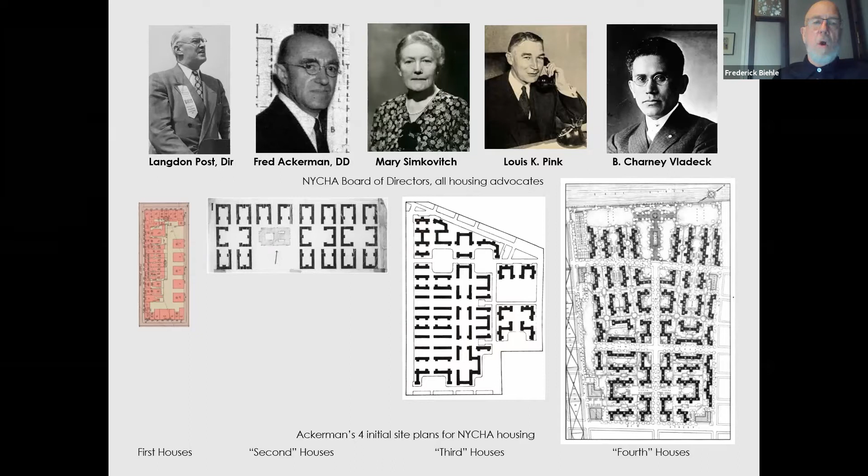For Williamsburg houses, NYCHA's next major development, Ackerman was prescribing what his experience had taught him would achieve a successful affordable housing model. His site plan was an open-ended perimeter block scheme, maybe even a bit boring in its deference to the more radical nature of NYCHA's mission.

Williamsburg was going to be 15 times the size of First Houses. It was all on the cusp of realization, an idea that Ackerman had been promoting and working towards since turning his attention to public housing during World War I.

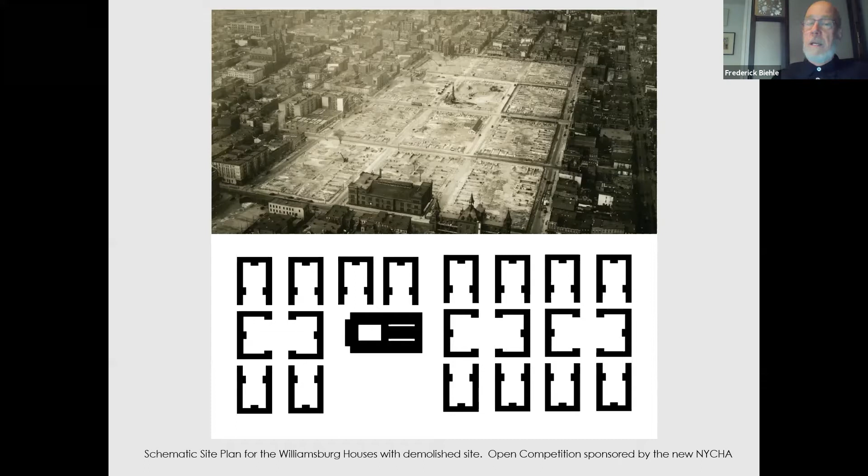But as fate would have it, Williamsburg houses would turn out not to be Ackerman's second houses. It would instead break with the accrued and tested housing expertise that the design group had endorsed and embrace someone and something else more exciting. William Lescaze and his brand of European modernism, who was imagining a wholly different future. Ackerman and everything he stood for would be out.

This was an action that in certain ways was a response to Philip Johnson and Henry Russell Hitchcock's critique from their 1932 International Style exhibition at the Museum of Modern Art, that American housing is sometimes an excellent illustration of sociological theory, but seldom an example of sound modern building and never a work of architectural distinction.

Williamsburg houses was going to be a work of architectural distinction, and it was also a response to Lewis Mumford and to the cascade of criticism that had rained down on that initial NYCHA project, Ackerman's First Houses.

It would be a propitious turning point, because architectural practice would henceforth need to choose between a daring formal style and a socially proven solution, between a disruptive spatial idea and a more conventional one. It was really no choice at all. And so consequently, for effective publicly financed affordable housing in America, that singular moment of opportunity was lost.

The early story of social housing in New York City is pretty well known. It begins in the late 19th century with housing reformers working to rectify substandard living conditions and reduce urban squalor. Minimum standards were introduced through building codes to make the interior spaces of multifamily buildings more livable. The New York Tenement Act and Tenement Law of 1901 were initial efforts at reducing block coverage and generating better access to daylight and fresh air.

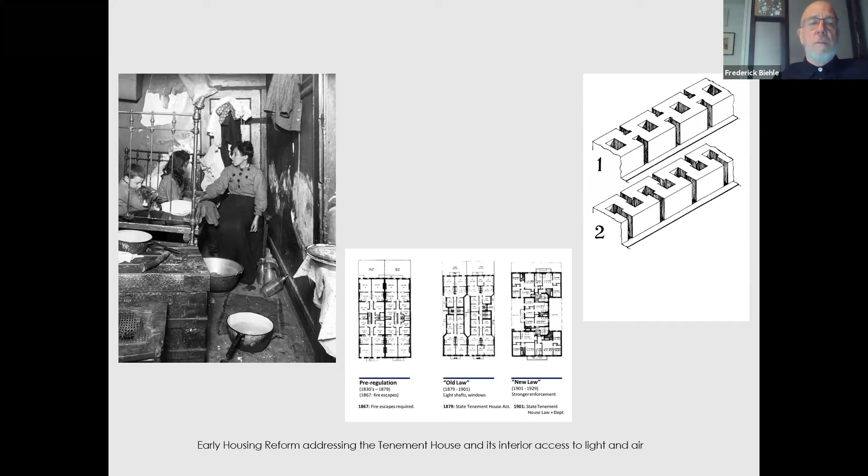In the early 20th century, philanthropic sponsorship promoted research into alternatives to tenement housing for the working and lower income classes. The architectural invention that emerged from this period was the perimeter block garden apartment. It was simply the result of applying the newer codes for lot coverage restrictions to the larger scale of an entire block. By controlling the block's perimeter, a new amenity, the interior garden court, was able to be introduced.

The 1920s would be the period for perimeter block development in New York. A survey of the projects produced by one of its leading practitioners, Andrew Thomas, gives a sense of the variety that an inventive and dedicated architect could produce.

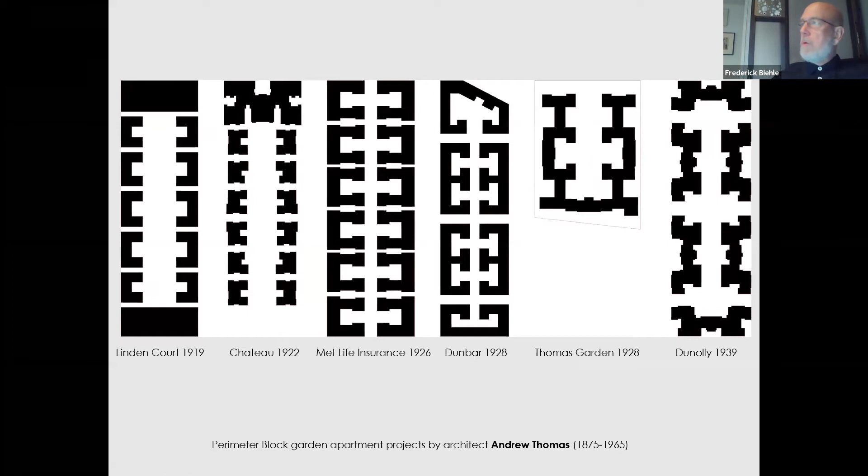Richard Plunz says of the type, "The garden apartment was and still is among the most livable housing in New York. It set a standard for urban housing that has remained unmatched since. The language of the garden was critical to the transformation of housing from a consequence of economic formulas to a unique environment, providing every building with an identity." Despite its success, the philanthropic initiative was of course not an adequate response for the demand for affordable housing.

And then with the stock market crash of 1929 and its resulting depression, the problem became a crisis. It would be addressed by Roosevelt's New Deal, but only when the political class came to the recognition that housing should be understood as a basic human right and thus a responsibility of the government itself.

The New York City Housing Authority was the agency empowered to manage the federal government's funding and to realize new affordable housing. Its history is really two conjoined stories, and both have been characterized by their quiet successes and loud failures. The first story tells of the struggles of those exceptionally dedicated reformers working with limited funding under a national spotlight to realize long-held aspirations.

A national housing bill would be passed, but only by accepting the compromises that distorted its underlying mission. Which begins the second story, how its leadership came to abandon the expertise of its own housing designers in favor of an untested and disruptive urban model, the Tower in the Park superblock housing estate. Consolidated under Robert Moses, NYCHA became an instrument of large-scale urban renewal. Demolition, so-called slum clearance, forcibly destroyed lower middle-class neighborhoods, doing irreparable damage to the lives of the very citizenry that NYCHA had been created to serve.

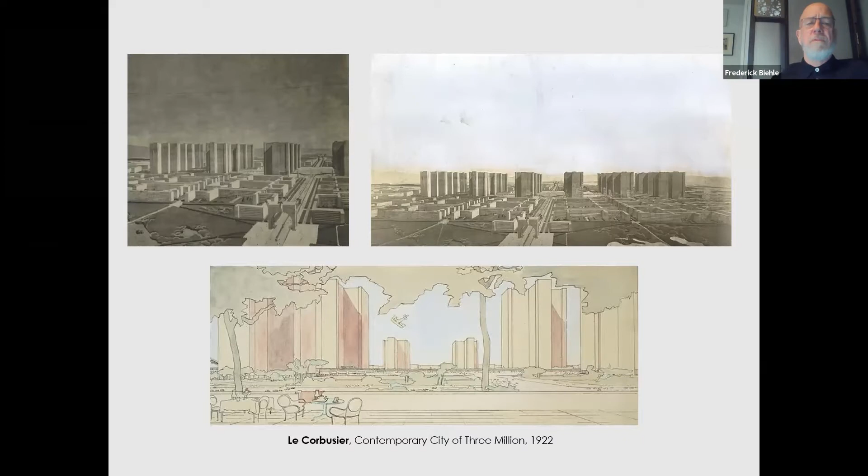He represented the scheme along with its adaptation to Paris as the Plan Voisin in his pavilion of the Esprit Nouveau at the Paris Exposition of Decorative Arts in 1925. He would also promote both projects in his quarterly publication, L'Esprit Nouveau, and as a standalone book on urban planning translated as The City of Tomorrow and Its Planning. As a provocation, it catapulted Le Corbusier to recognition, even as it remained, at least for the time, unrealized.

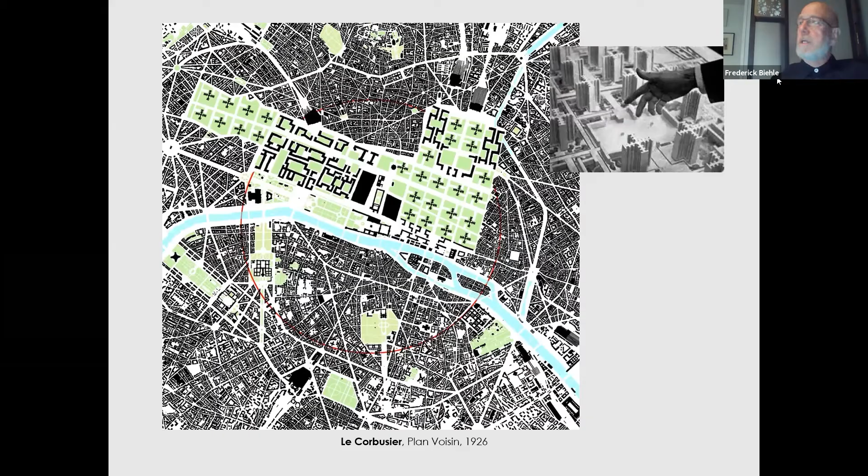In the early 1930s, the new ideas being championed in the United States were less about the tower and more about lower-rise, lower-density projects that had addressed the European housing shortage. Millions had been uprooted and an entire generation lost to World War I. Social trauma had persisted, resulting in rising labor discontent. Affordable housing was a key component for maintaining the stability of a capitalist system facing a crisis of legitimacy. In America, it would be the Depression that would generate the same post-war-like social trauma and instability.

During the 1920s in Europe, modernism blossomed in smaller towns where younger architects found municipal appointments or commissions. Otto Haesler in Kassel, Walter Gropius in Dessau, Bruno and Max Taut, Hans Scharoun, Mies van der Rohe in Berlin under Martin Wagner's public housing program. Thus would mass housing become the program synonymous with modernism. By embracing construction standards, a functional approach to necessary space, and providing an enlarged social program when planning large exurban neighborhoods or Siedlungen, they were solving the principal social problem of the day. Catherine Bauer promoted them in words and images as utopian in her influential book, Modern Housing.

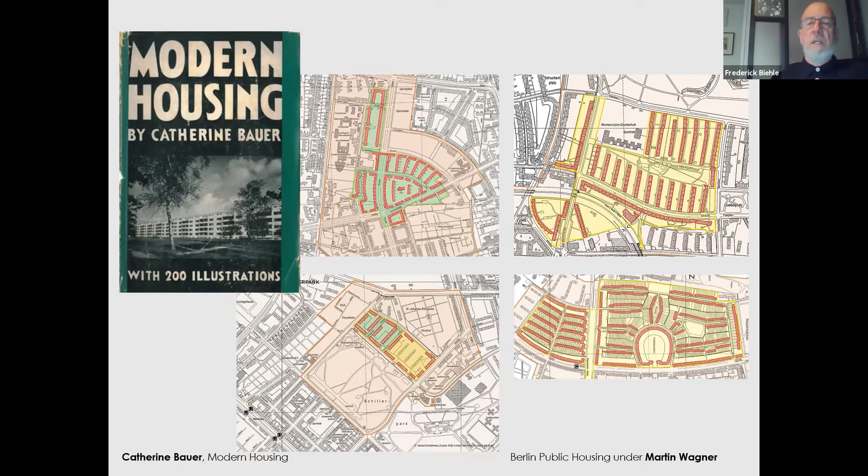This was the landscape surveyed by Philip Johnson and Henry-Russell Hitchcock for their groundbreaking 1932 exhibition, Modern Architecture: International Style, at the new Museum of Modern Art. The exhibit gave the museum an opportunity not just to showcase the research, but to critique American social housing by comparing it unfavorably with what was happening abroad. The criticism was made explicit by presenting an International Style proposal by Howe and Lescaze for a site on Manhattan's Lower East Side didactically, side by side, with German architect Otto Haesler's recent Siedlung Rothenberg in Kassel, a perfect example of the Zeilenbau planning that Johnson so admired. It was an authoritative display of what was being done in the German suburbs, together with what can be done in the American inner city.

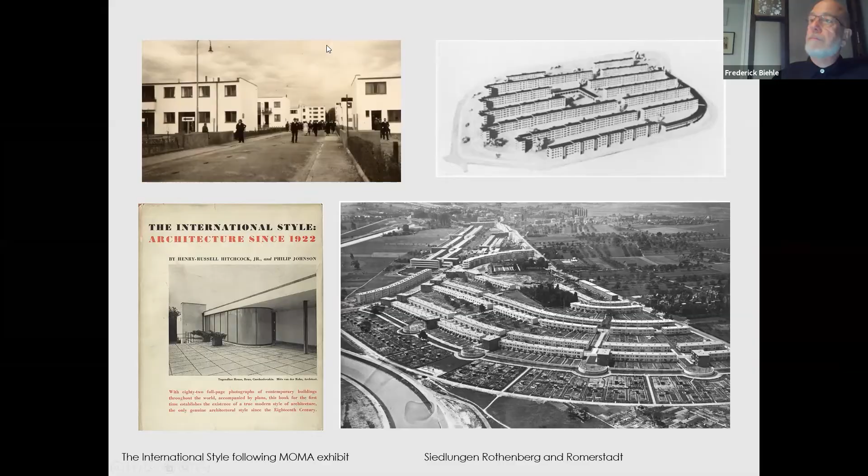The scheme, for which Lescaze later took full credit, was perhaps the most brilliant project of his emerging career. It adapted aspects of the superblock in a rather clever way to the long shape and scale of the site. It introduced New York City to the aesthetics of European-style social housing and anticipated the superblock strategies that would be embraced a few years later. It was a kind of superblock, but in the relationship between built form and open space, it was something of a Trojan horse. What made it so good was that it was still a fully urban project embedded within the gridiron.

But with its overreaching vertical presence, it could inaugurate the public to the idea that federally financed housing, then being debated, would not fully integrate into the surrounding city, but stand out and be recognizable as a wholly new identity. The project presented Johnson and Hitchcock's argument for a more intellectual functional style, relocated from the German periphery to the center of the American city.

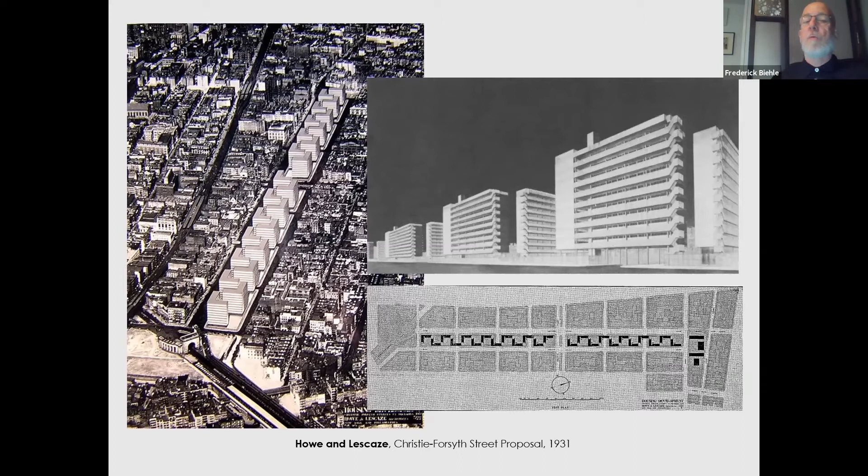The perimeter block garden apartment and its carefully built body of successful housing research was really dismissed. Johnson and Hitchcock were simply unsympathetic to the broader housing movement in the United States and the implications for architectural values and practice that it represented. As Plunz noted, they were, quote, promoting a moralism grounded in aesthetics rather than social activism, end quote.

The irony is that the positive evidence of those broader architectural values had been included in the very same exhibition itself. Because Mumford and Bauer had been able to curate the room on American housing, they had presented Sunnyside Gardens, which is there on the screen on the left, as the model of transatlantic exchange, a project that had managed to adapt European housing principles to American social, economic, and cultural realities. And yet Johnson banished images of Sunnyside Gardens from all publications on the exhibit. Its brick perimeter block form didn't fit his prescribed aesthetic.

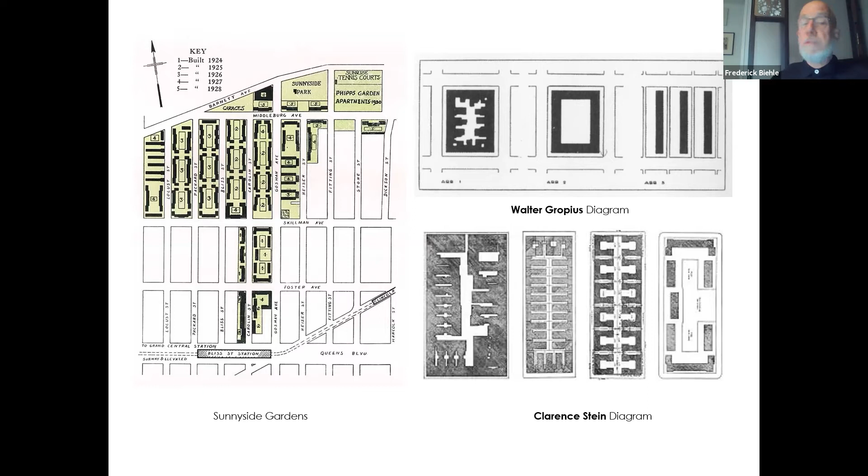A comparison of the urban evolution diagrams produced by Gropius on the one hand, which is the upper right, and Stein on the other, which is in the lower right, distills the differences. Gropius concludes with the graphically compelling linear Zellenbau bands, where Stein stops a bit earlier, using a variation of a Sunnyside Gardens perimeter block, stepped and segmented. Gropius's diagram abandons urban context, where Stein's harnesses and reforms it. Yet it was the Gropius diagram that would prove to be more seductive and therefore influential.

By 1932, the year of that exhibit, its application was already in the air. Carol Aravanici teamed with William Lescaze to produce what they called a housing demonstration, utilizing an area of Queens to propose the demolition and construction of an entire neighborhood with Zellenbau-aligned housing. Morris Brounn and William Muschenheim the next year proposed something similar for Manhattan, an enormous slum clearance scheme that covered 30 blocks with rows of linear slab housing.

Plunz explains the contradiction with transplanting suburban spatial ideas into dense urban contexts. Quote, "The scheme typified the manner in which the new European work came to be misapplied in the United States. The Zellenbau form, which had evolved in Europe as a suburban housing type for relatively low densities, was being applied to vastly different contexts in New York City and suffered from not being able to recognize the physical spatial difference between the two social housing applications. Descriptions of European Siedlungen and New York tenements were interspersed as if the two were interchangeable," end quote.

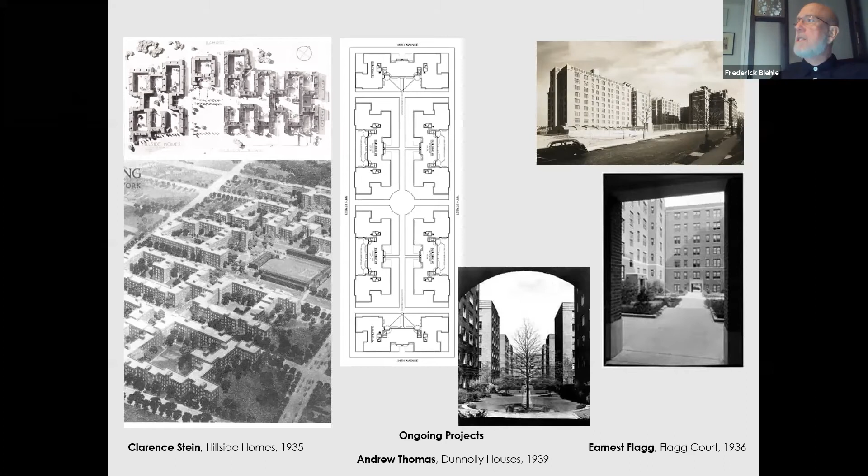While the European influences were making noise, it was perimeter block projects that were continuing to be realized. Ernest Flagg's Flagg Court in 1933 to 36, Clarence Stein's Hillside Homes from 1935, and Andrew Thomas just kept turning out his signature perimeter block work year after year. Consistent with what was being realized, Ackerman, in his first year at NYCHA, published an analysis of 23 apartment projects for moderate income tenants. Almost every one was a perimeter block garden apartment type. This was really the primer from which the revolution of public housing was intended to emerge.

So who is this Frederick Ackerman we have never really heard of? Well, he was in fact a leading voice in the architecture and planning professions throughout the 1910s, 20s, and 30s. One of the few theorists of rationalist architectural discourse in America. And yet, for all of his early prominence and professional success, his voice and influence are almost entirely absent today. Educated at Cornell, and then afterwards in Paris, he began his practice in New York City in 1905 by focusing on housing, city planning, and a progressive social agenda.

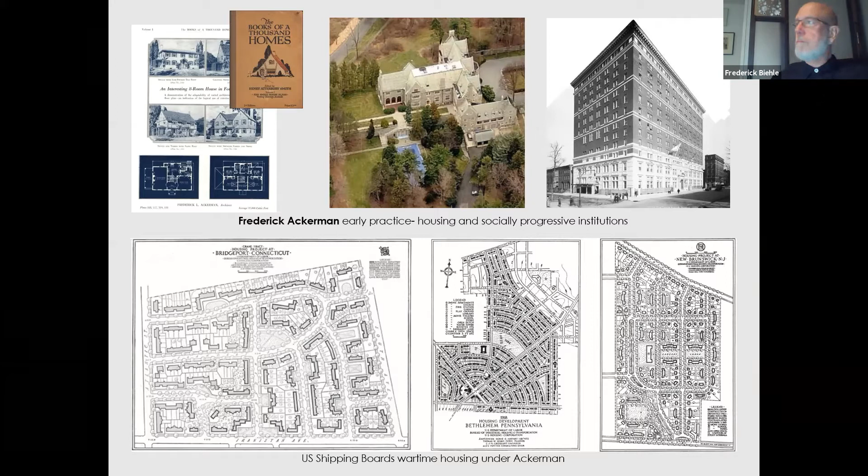He returned to private practice as the recognized housing expert. In 1923, he helped form the RPAA with fellow wartime housing advocates. He collaborated with Stein and Wright on Sunnyside Gardens by designing the architectural fabric, the actual buildings. He partnered with them on their influential Radburn, New Jersey project as well, designing the community buildings.

He was ideologically anti-capitalist, perceiving his role as architect first and foremost as a social service. His working method was based on ideas for improving and modernizing the profession, integrating standardization, promoting greater efficiency, expressing form as a direct product of function, and expanding the architect's role into responsible programming.

He entirely rejected architectural style as a product of, quote, conspicuous consumption, end quote, a false methodology manipulated and controlled by a demand for profit. The true and necessary evolution of architecture, he felt, could only be achieved with the replacement of the capitalist system itself.

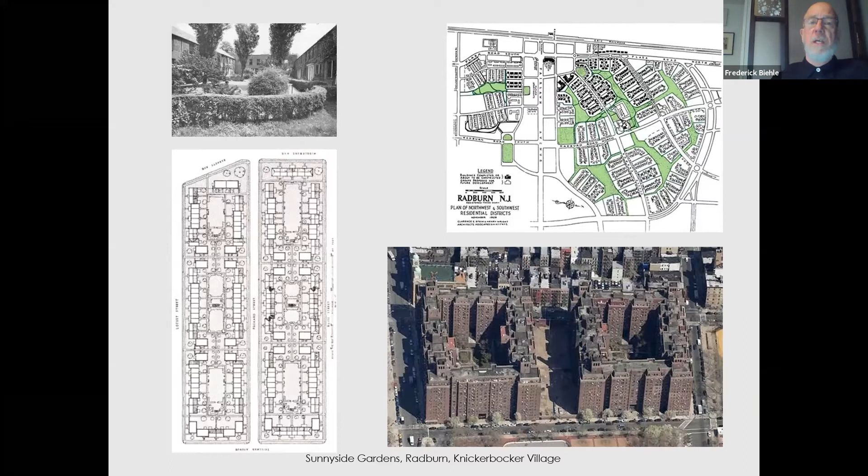During the early years of the Depression, two of Ackerman's associates, Harold Sleeper and Charles Ramsey, initiated a project to document the rationalist methodology of his office as a handbook for the profession. The publication was Architectural Graphic Standards. It was intended as a manifesto, absent of style, and therefore a revolutionary kind of document. Its release happened to coincide with Johnson's International Style exhibition, which Ackerman had summarily rejected as a superficial exercise.

It is perhaps emblematic that the book that came to be referred to as the Architect's Bible, and which has sold more than any other book on architecture, and is based entirely on the theory and practice of one man, nowhere mentions or identifies that individual.

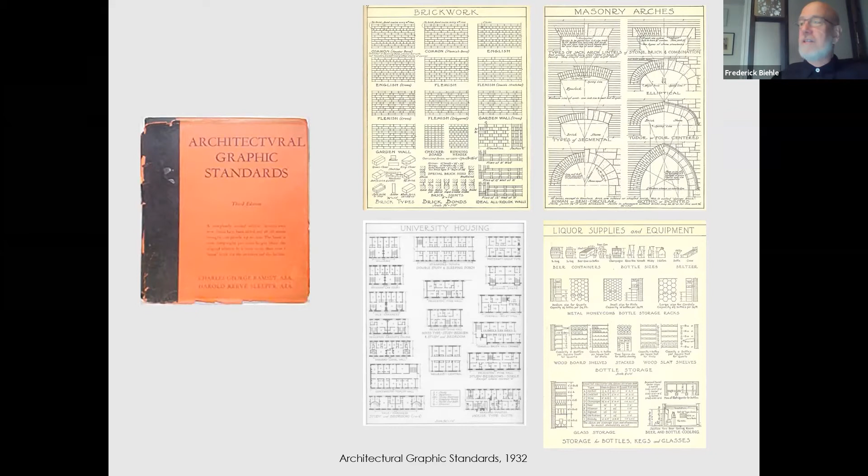First Houses. The selection of Ackerman to lead NYCHA's new design department had been inspired. He was not only the preeminent affordable housing designer, he was ethically and ideologically motivated by the underlying social mission. First Houses was a very modest foray into the contentious world of federally financed housing.

Intended as a tenement renovation project, Ackerman proposed removing every third building to open up the block to light and air. L-shaped along 2 streets, it included a full block of storefront retail space with similar residences above. Entrances were from the side and rear of the buildings from a semi-public garden for shared passive recreation.

Stylistically, it was also unique by its virtual elimination of ornament and architectural articulation whatsoever. The absence of architectural detail was consistent with Ackerman's rationalist sensibility. Its architectural generosity was in its use of natural light, air, and common garden space, but with no articulation around the windows and the most minimal reference to the building cornice line, as well as without front entrances, there's absolutely nothing to break the radical monotony of its relentless brown brick walls.

The result is a project unique in the annals of New York City's housing portfolio. It is derived from its uncompromised, functionally determinate appearance, together with the integration of well-defined open space. The project holds the street, maintaining a direct and continuous relationship to the surrounding city, and accepts that apartments alone do not make housing, including not only commercial retail program, but a full array of ground floor amenities as well.

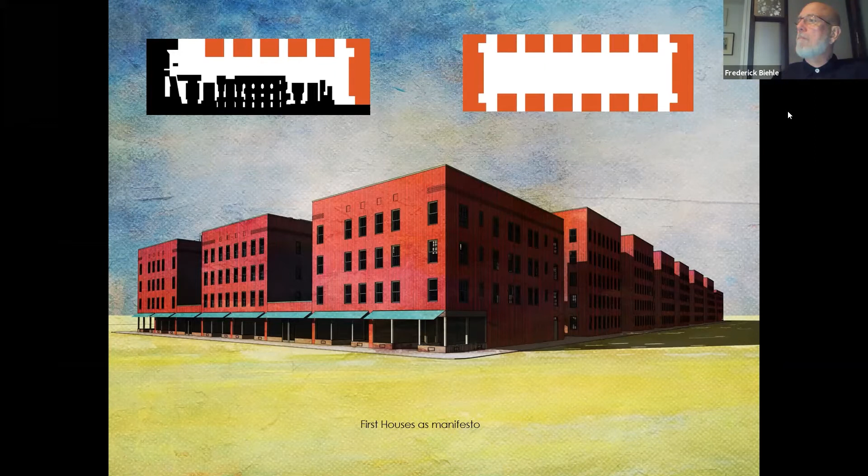But that was not to happen. What would be imitated was Ackerman's more radical banality, his elimination of decorative detail and reduction of the building experience to its massing and composition of punched windows. In Ackerman's hands, this was a more effective rationalism than anything Henry Russell Hitchcock or Philip Johnson had sought.

First Houses today can be understood as a precursor fragment to the typological city that Aldo Rossi characterized as embedded within our collective memory. It is adamantly an extension of the city's urban fabric, rendering it, and by extension its inhabitants, anonymous yet fully integrated participants.

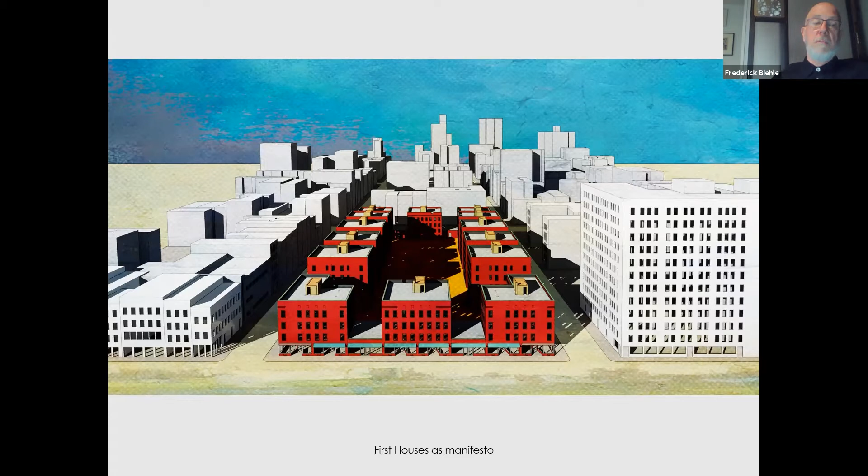The Wikipedia entry for First Houses repeats the story that the project was too expensive. It is a story that perhaps explains why such an interesting idea was a dead end and did not become the model for the future of affordable housing. Because it had been intended as a renovation and because the stability of the existing buildings did not stand up to that intention, NYCHA was forced to demolish everything and construct them new.

Lower construction costs are always paramount with affordable housing, yet First Houses was of course going to be more expensive. It was too small. It had to re-strategize its construction scope while underway, and it had a low square foot to core ratio. It is not comparable dollar for dollar with the later larger projects. Regardless, the acrimony over cost seems to have turned the perimeter block as a planning type into the baby that got thrown out with the cost overrun bathwater. The perimeter block type would not be introduced again.

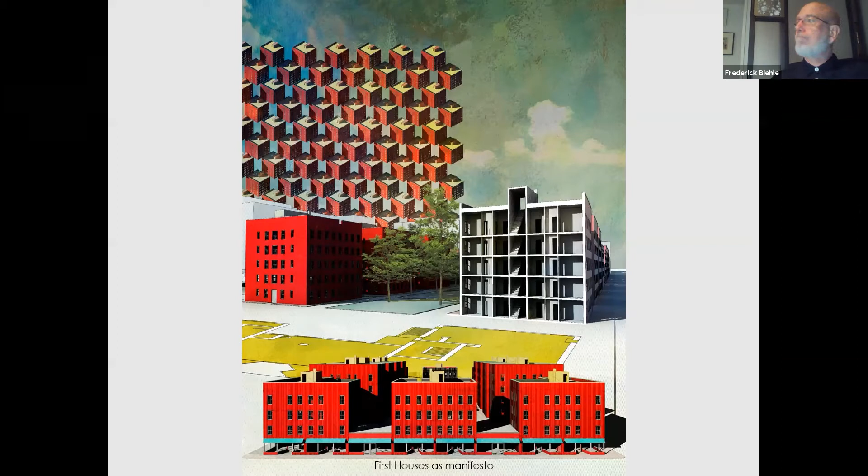With First Houses underway, Ackerman had organized an architectural competition for the second project and to select qualified firms to produce future NYCHA efforts as well.

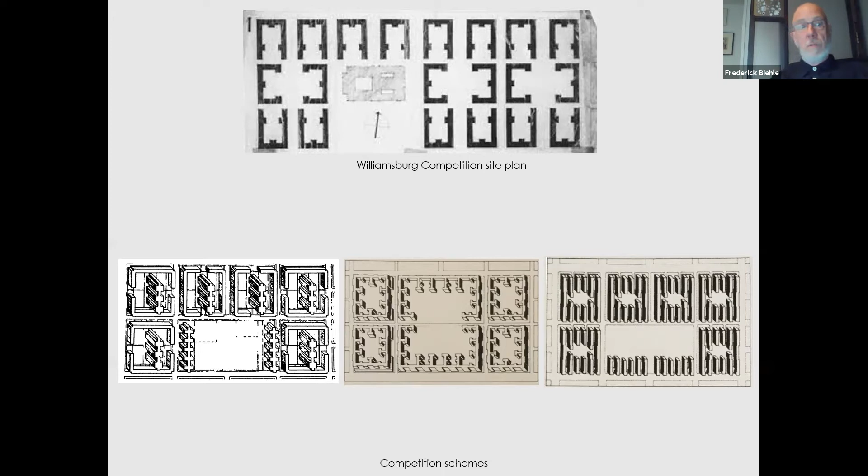Instead, the commission was handed to Richmond Shreve, whose firm had recently completed the Empire State Building. He was also president of the AIA, a NYCHA advisory board member, and had been a competition juror. Shreve then did something even more surprising. He hired William Lescaze to be his project designer. Plunz sort of gets to the point. Quote, "The fact that Shreve was chosen indicates that extraordinary influence was brought to bear," end quote.

William Lescaze, the man tapped by Shreve to give the project a more modern look, was an architect of enormous ambition who had positioned himself as the face of European modernism in America. He had emigrated from Switzerland after studying with Karl Moser, an early modernist. Starting with nothing but his own assuredness, by the latter part of the decade, he had built a serious architectural practice. Shreve needed Lescaze to give his design team currency, and Lescaze delivered.

Taking on Ackerman's site plan, he would defy its integrated effect by modifying the buildings into H and T shapes, rotating them 15 degrees. It proved to be just what was wanted, a gesture of grid-defying bravura, giving the project its desired distinction. Anyone looking for a social, practical, or functional justification for the rotation would come up short. Boilerplate rhetoric about orientation to the sun is frequently cited, but this is not really accurate. Lescaze himself stated that it offered more windows and play space, but the modifications actually subtracted usable outdoor space. The gesture was purely aesthetic.

William Palmer's cutting description of Lescaze provides the best understanding of his act. It was characteristic of Lescaze to seek the attention-getting aesthetic effect of a pseudo-Zeilenbau system. After all, he had a flair for the bravura effects of modernism as publicity. So it was a project that broke with convention to attract attention to its author and to the project itself. By disengaging from the urban context that surrounded it, Williamsburg Houses declared its indifference and reset the terms of urban intervention. There will be no compromise. The only dialogue was a demand that the surrounding city conform to its new spatial paradigm.

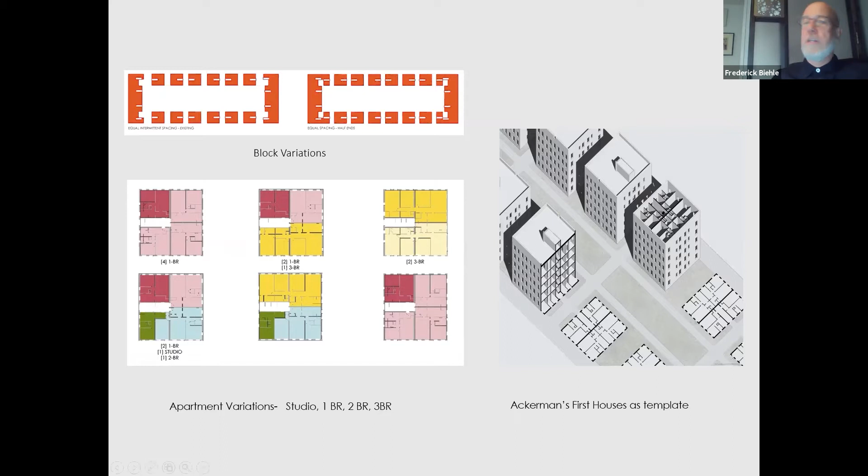So as an example, we tested the First Houses typology against a New York City Housing Authority superblock site. Fort Greene Houses was the largest public housing development in the country when constructed in 1941, requiring the demolition of 22 blocks to generate a setting for 5 superblocks and nearly 3,500 apartments. Mayor LaGuardia called it the most daring housing project ever attempted by this or any other city in the country.

And yet only 15 years later, it would be profiled as one of the starkest examples of the failures of public housing. To what degree can this failure be attributed to the architecture and the site planning? In contrast, First Houses has never had these issues. It was able to retain and reinforce a sense of community. Its open spaces are understood to be held in common.

The result is that they offer the tenants something more, imparting a sense of generosity, even a dignity to their daily experience, an experience that extends into and engages then with the surrounding city. This was not true at Fort Greene, which, following the Williamsburg model, chose to leave its ample open space undefined and allow its buildings to stand apart from the larger city.

Extrapolating the First Houses typology over Fort Greene's original 22 blocks reveals that it would have produced an equal number of apartments while adding 27 blocks of commercial retail conveniences and 13 interior gardens, all supported by unique amenities. It would have been a radical project because of its size, of course, but fundamentally banal as basic urban fabric, another indistinguishable part of the city.

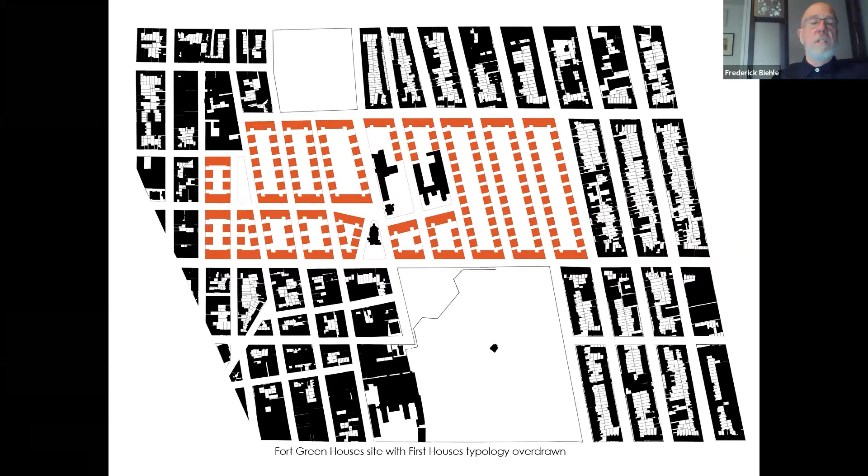The affordable housing discourse today has put forward a number of important ideas: integrating different incomes rather than partitioning low-income tenants, eliminating exclusionary zoning to include commercial institutional programming, strategizing job opportunities for residents with the same commercial institutional programs, including socially relevant amenities and community spaces. In short, making affordable housing more a reflection of the city itself and not something that can be distinguished from it. All of these ideas are easily adaptable to, if not already included in, Ackerman's First Houses typology.

William Lescaze's Williamsburg Houses project was completed in 1938. The actual schism between the pseudo-suburban Siedlung and its fully urbanized context was recognized immediately, but not fully understood. Its aesthetic distinctiveness, its rotation, is what architects fixated on, quickly making it one of the most recognizable and imitated features of public housing.

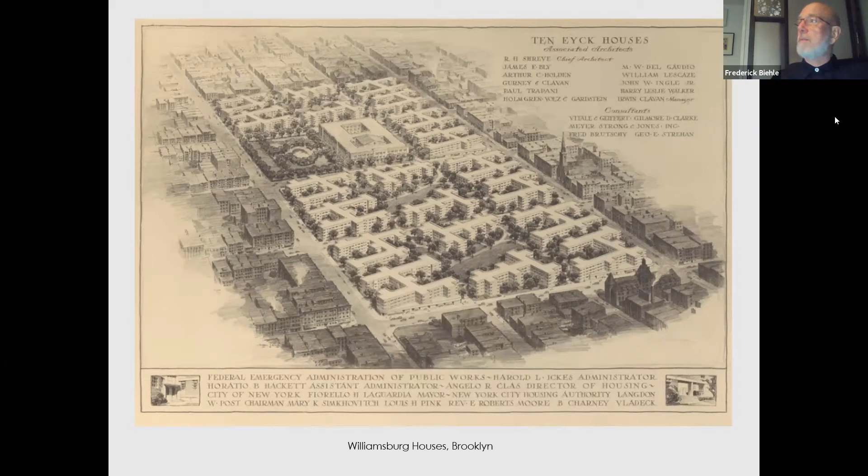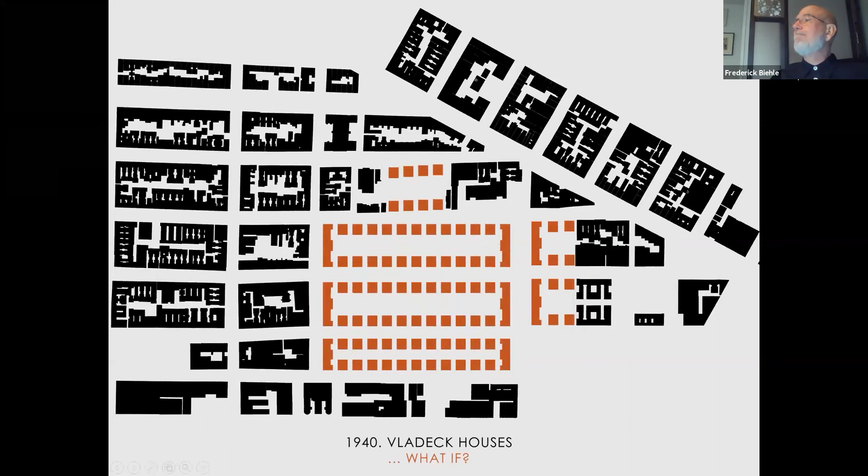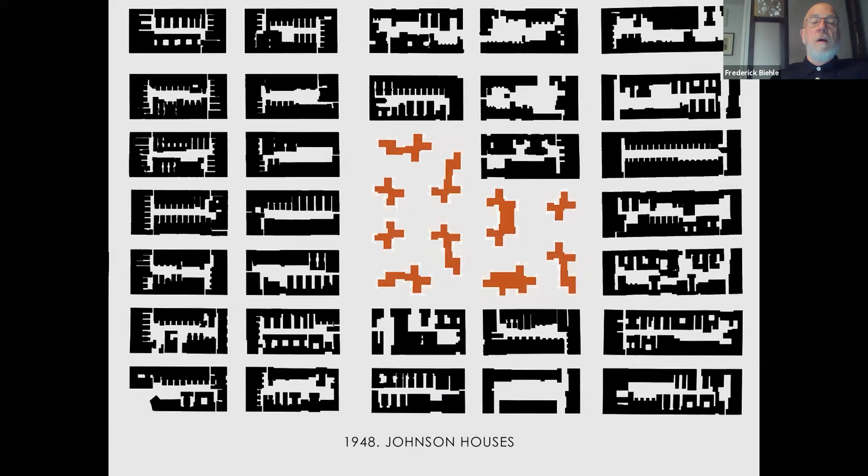2 years later would come Queensbridge Houses, then the Vladeck Houses on the Lower East Side. The next year would see Kingsborough Houses and East River Houses. In 1942 was Fort Greene, only to be followed post-war by an explosion of demolition, like the Johnson Houses and the Riis and Wald Houses.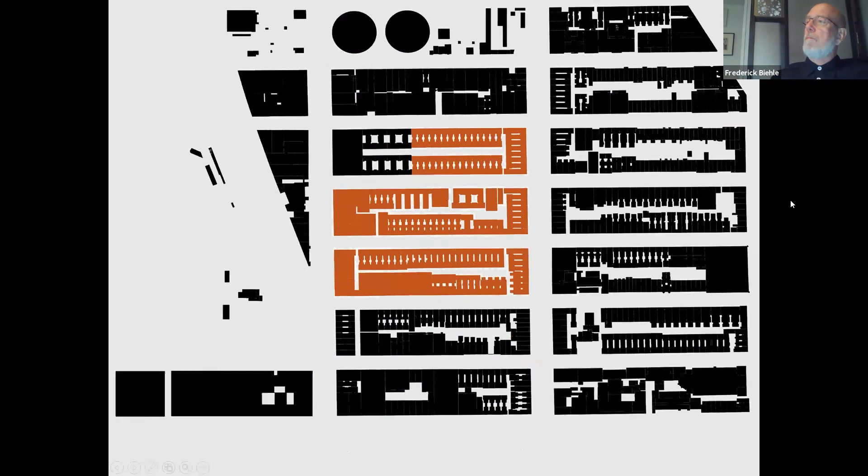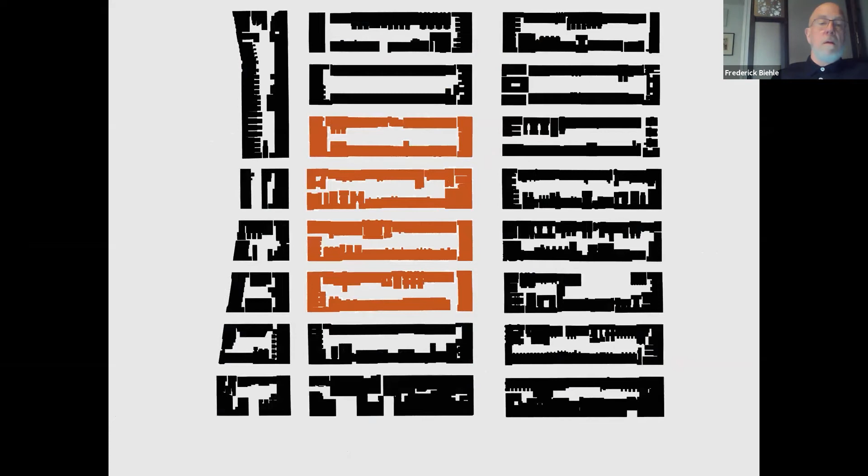All were superblock slum clearing efforts. They also all followed Williamsburg's lead, pushing the linear Zeilenbau slabs toward Tower in the Park.

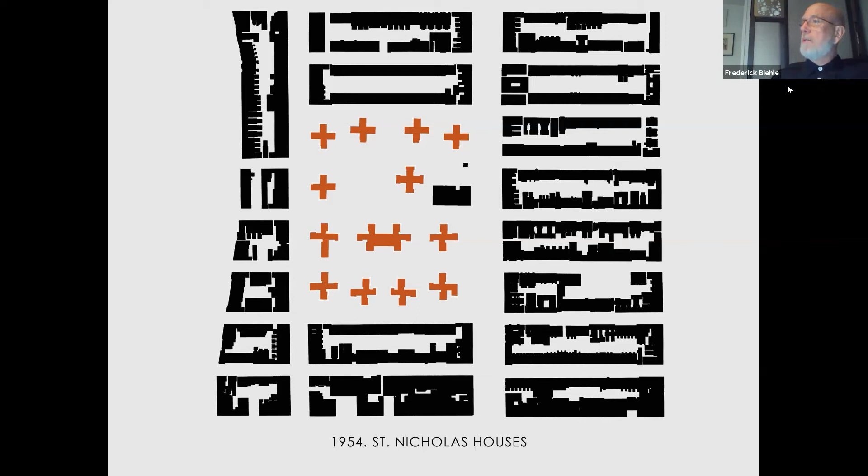Come on, it's not working. There we go.

NYCHA never looked back.

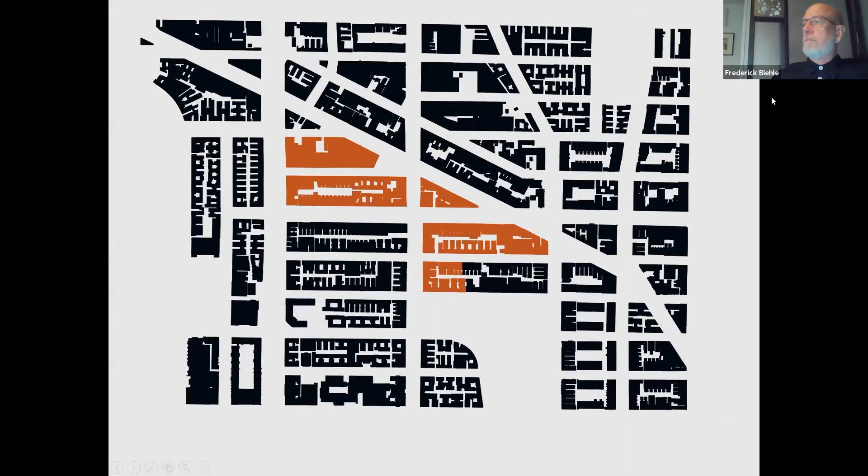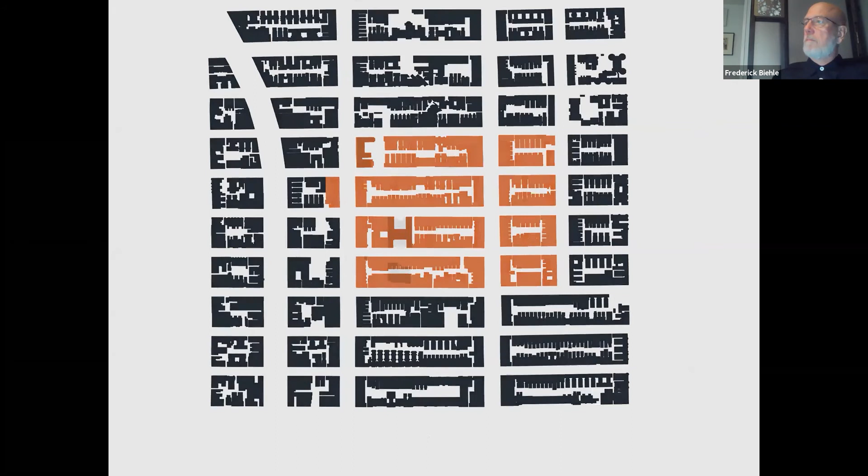So what does make urban urban? In his 2009 publication, Public Housing That Worked, Nicholas Bloom provided an in-depth critique of public housing and its perceived failure in the United States. His thesis overturned much of the conventional wisdom and triggered a debate on current housing policy. He claimed that while most of America's public housing was in fact a disaster, New York City's was not.

It was New York City's housing authority that had created, overseen, and maintained a product of nearly 2,500 buildings and a system that could and continues to satisfy the housing needs for over 400,000 tenants. In short, it worked. It's a position, however, that only stands up when defining success through the narrow lens of bureaucratic workability. The bottom-up recovery and revitalization of more traditional housing fabric allowed to remain that surrounds superblock housing estates would seem to be a refutation of its own.

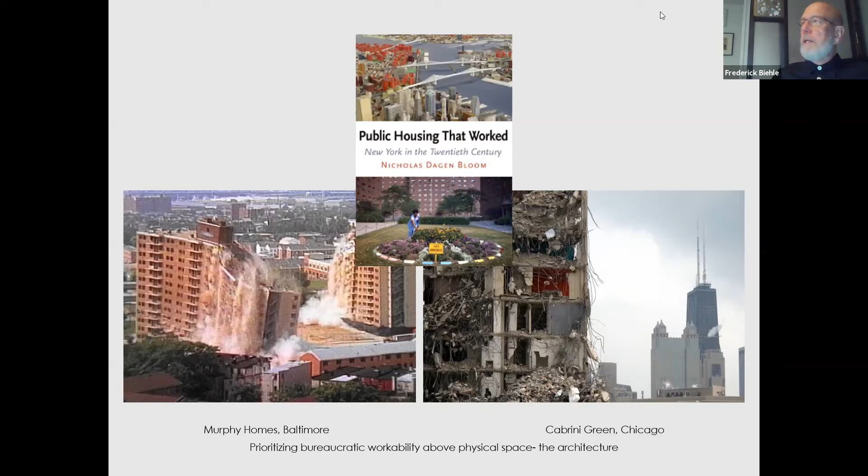The surrounding population continues to coexist with public housing superblocks as if they are not even there, circumnavigating them, disregarding them, or just avoiding them completely. For 7.5 million New Yorkers, they remain island wastelands, anti-cities within the city. The opening of Williamsburg Houses challenged what it meant to be urban.

It inspired Chicago sociologist Louis Wirth to define it more precisely by saying, of course, urbanism included size, density, and heterogeneity, but it was also a specific and unique way of life. To be urban was to experience a set of human interactions that were impersonal rather than intimate. Jane Jacobs had pursued the same idea in The Death and Life of Great American Cities as the "daily ballet" of the sidewalk, the recurrent and anonymous interactions that make up each person's informal public life.

For Jacobs, the informal public life was urbanism as lived, the spontaneous and cumulative experience of the street and sidewalk. Steven Johnson cites Jacobs specifically for her description of that urban dance, explaining that the city is and always has been more of an emergent than an authoritarian system, evolving bottom-up as a constantly mutating multitude of independent and interdependent interactions. He concludes: better sidewalks do make better cities by improving the lives of city dwellers.

City life depends on that accidental interaction between strangers that has the potential to influence, to change one's individual behavior, to alter one's perspective. In the case of public housing, First Houses had preserved those streets and sidewalks, keeping alive the potential to influence. In nearly every NYCHA project that followed it, the streets and sidewalks were gone.

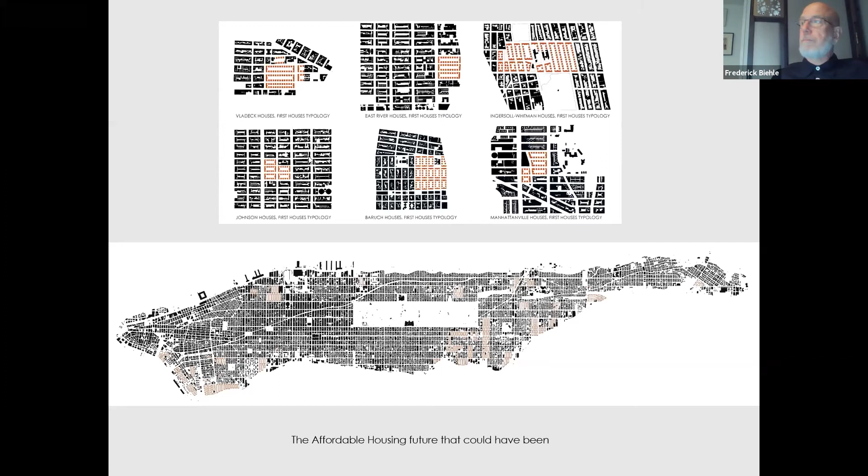Kahn's concluding sentence laid down the challenge: the problem of the 21st century will be how we re-urbanize, that is, how we fix the mistakes of our anti-urban 20th century. In proposing solutions to this question, we can perhaps see that architectural practice might get a second chance to identify itself, like Frederick Ackerman, with a moral position grounded in social activism rather than aesthetics.

So that is my morality tale, which reframes the disaster of public housing not as an accident, but the result of a sequence of clear-eyed choices that upset a course of action that intended to, or would have, put us in a very different place today.

All I can say is that perhaps greater awareness might open up the possibility about doing something about it, which brings me to another question, which challenges my last statement: is it really too late to apply that Ackerman typology? I think as architects, we like to discuss affordable housing as a design issue, at least in architectural schools. And as a designer, I'm always curious to know what any challenge is going to bring.

But it seems to me housing, and in particular affordable housing, might be more about applying formulas: access to light, single, double, triple sides, horizontal versus vertical circulation, the number of stories. Are we talking low rise? Are we talking something taller? And with the application of formulas comes the question of identity and visibility. Affordable housing might be a program that demands anonymity to be part of the urban fabric without standing out from it. Design today wants to be anything but anonymous. Design wants to be distinctive. So can it be both?

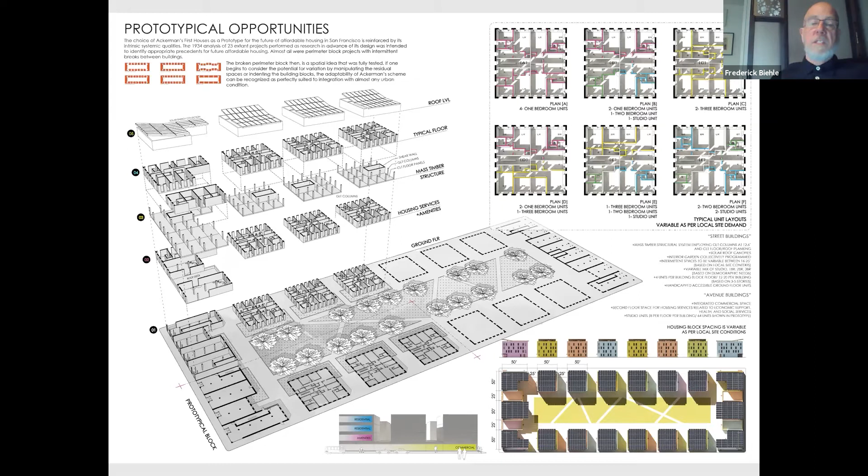And then we looked at San Francisco and somewhat arbitrarily identified several centralized locations with different underdeveloped block conditions, and applied the template.

So this is what we got. For North Beach, we had a full empty block and a half block, a bit like the original first houses. And this seemed to adapt pretty easily to both of these sites.

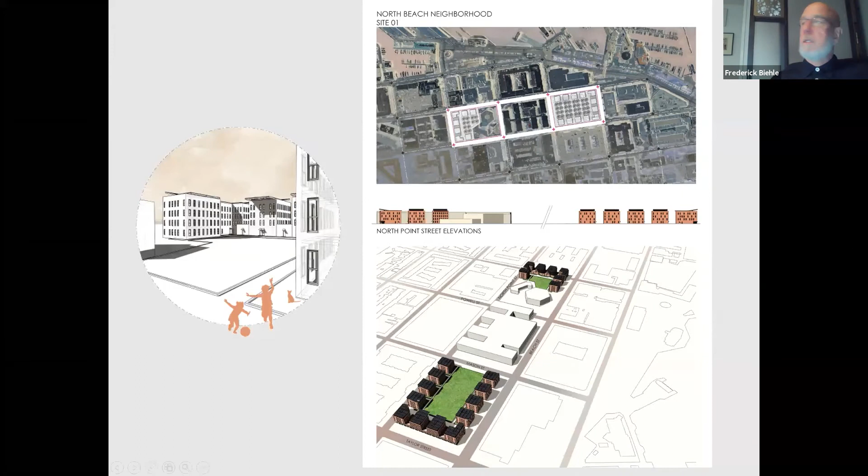In one of the Soma neighborhoods, we were looking for something that would be a little more fragmentary, so that we could use the system as a kind of infill. And that's what we found here, integrating together with other existing buildings.

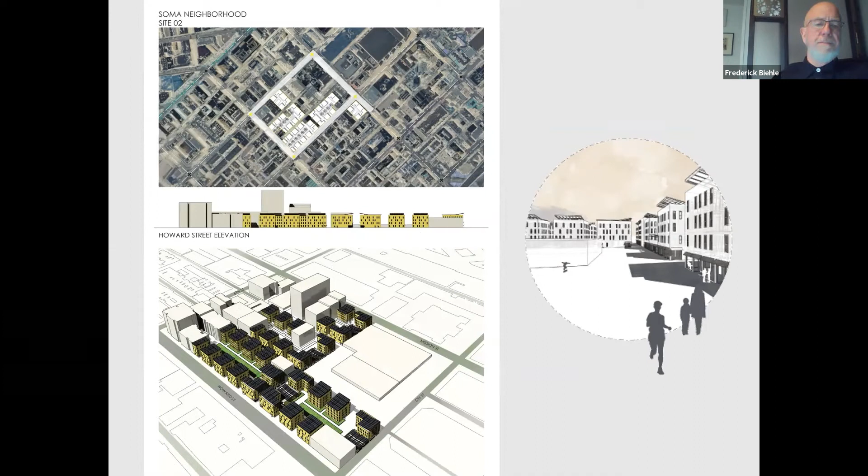And then for the last site, we wanted to test out an irregular block, something that was perhaps triangulated. Is the system flexible enough to apply to that as well? And sure enough, I think it was.

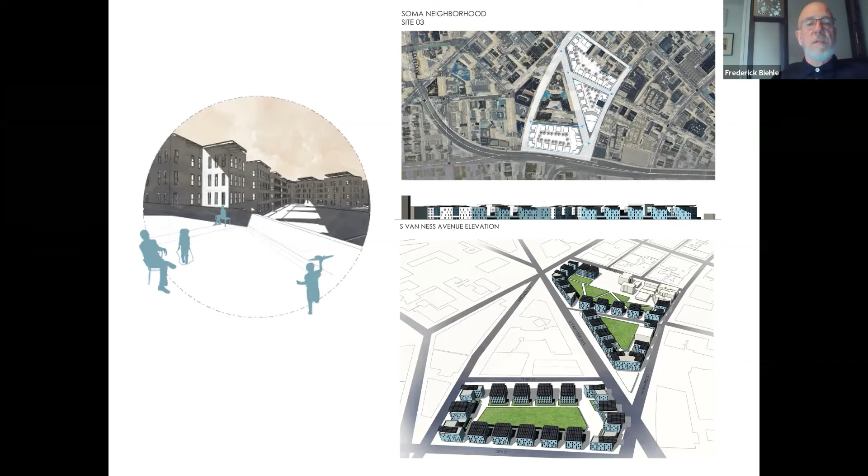So needless to say, we didn't get very far with the competition, which I suppose is to be expected if you enter a design competition and declare that it's not about design.

So we tried it again, this time for the Melbourne Housing Challenge, a second demonstration. For the Melbourne Challenge, we toned down the rhetoric and generated a slightly more designed look for our starting template, but it really is an application of the same formula, which is to say we remain fully in debt to Frederick Ackerman.

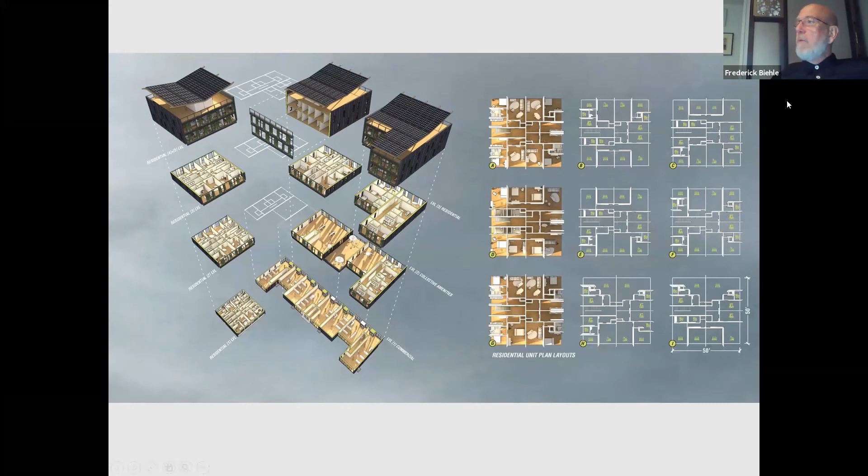And then we attempted to identify sites in Melbourne, which proved to be much more challenging because overall it's a lower, flatter city than San Francisco and incredibly dense, very little open space available, except for one thing, of course: its public housing superblocks.

In spite of the well-known international failures of Tower in the Park modernism, and the success of its own low-rise, high-density housing, the Victorian State Government's Housing Commission between 1964 and 1970 cleared 28 sites across inner Melbourne for the development of 47 20-to-30-story high-rise housing blocks situated in unadorned landscape.

So we thought those superblock sites might be our opportunity. First, as it's publicly owned land, one of the principal economic obstacles could be eliminated. Second, desuburbanizing the sites with new infill affordable housing might better integrate the towers with their surrounding neighborhoods. So our proposal was to develop all 28 sites, but we presented just 4.

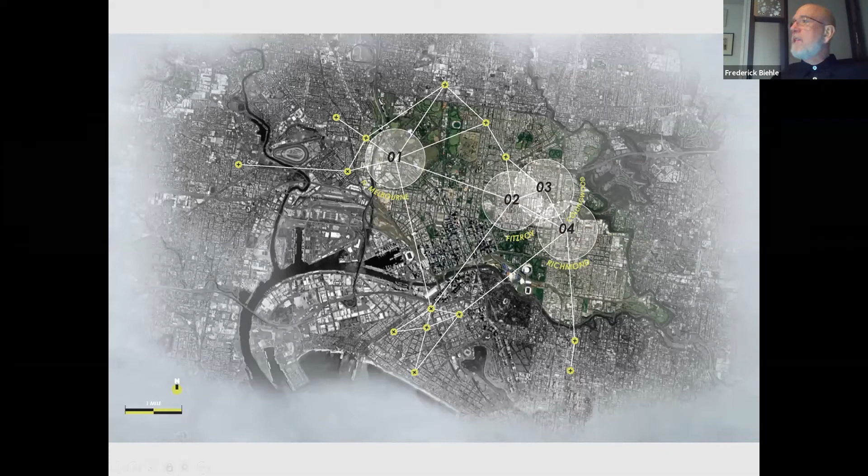Like San Francisco, each had its unique differences. For the Collingwood estate, it required us to introduce 2 new streets and kind of return or reblock the site in a way that was not exactly the same, but similar to its original grid. And then the Ackerman overlay works together with the existing S-shaped towers on 2 of the 3 blocks.

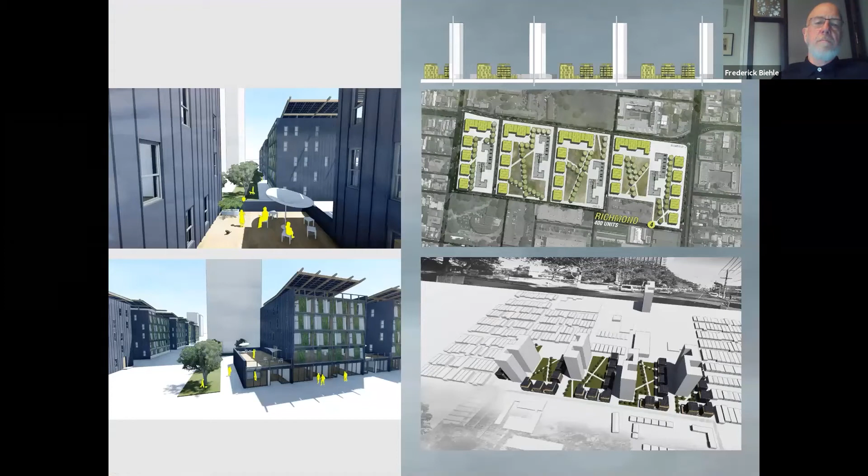And at the Fitzroy estate, we subdivided the superblock into 2 new blocks with 2 S-shaped towers that could work together with the Ackerman elements to form perimeters and internal gardens. At the Richmond estate, we had 4 different blocks. And then in North Melbourne, this is our single triangulated site. We mediated between the block's boundary and the standalone towers.

So I think what was important for both of these was really plausibility. Both proposals seem to suggest that if one was interested in developing a low-rise, mostly prefabricatable, environmentally responsible, affordable housing that could respond to a wide set of possibilities, then in fact it could work. But the Ackerman typology also seemed to work best when attempting to restore urban fabric—that would be the San Francisco version. For the Melbourne challenge of mediating towers with low-rise surrounding fabric, probably a few more tools would be best.

And that's going to take me to my last question, which goes back to the end of the morality tale. What can we really do about resolving NYCHA, those 2,500 buildings on 300 sites?

This is the challenge I've been offering with my Pratt Institute design studios for the past 5 years. It's a studio that begins by suggesting perhaps the superblock is simply unfinished. And if so, then how might it be possible to add to it, to fill in the undefined residual space, in such a way that it can re-urbanize and restore its interconnectedness with the fabric that surrounds it?

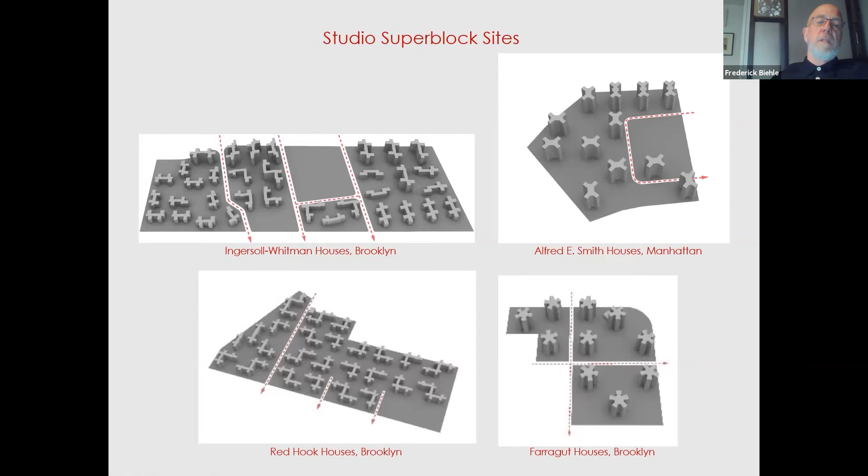The first step is to restore the idea of the street. The superblock eliminated not only the actual streets, but the very idea of the street, the spatial presence that frames the collective activity of an urban neighborhood. By restreeting the superblock, you can open an opportunity to restore that collective activity.

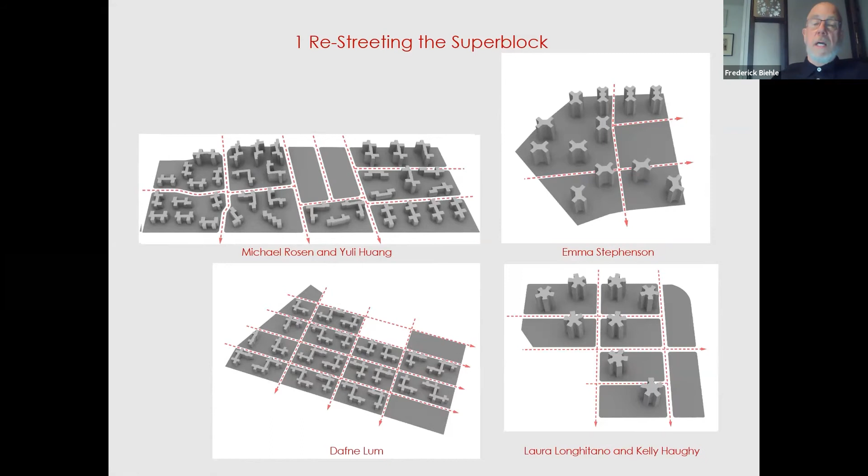And then the second step is to reshape the urban fabric in response to the altered street pattern, by introducing lower-rise, typically infill architecture to shape the residual space—specifically, the towers will disappear into a new block's figure-ground. Reshaping and giving definition to the new fabric is what allows urban continuity to be recovered.

So what's actually been interesting is that after doing these studios, selecting different sites, having different studio groups over a period of 5 years, we've produced maybe 50 different projects. And what's happened is a distinct set of urban typologies has begun to emerge as to how to handle superblock sites in spite of all of their differences. And so here's a few of these: the microblock.

Kind of an obvious solution, really, because it identifies each of the NYCHA buildings. There you see the Ingersoll-Whitman, the one that we use as our test case.

It identifies each individual building as being the centerpiece for a new block, as you see on the right. And then depending on the sort of pattern or organizational conditions of the original NYCHA project, you end up with results that can be somewhat organic, as in the Ingersoll-Whitman, or quite familiar in the Farragut, as you see with the Farragut houses.

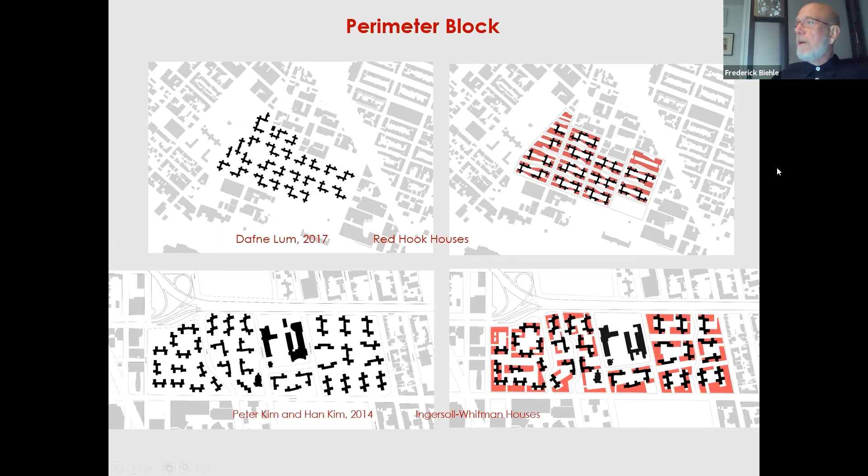And then the replicating block, which I call it that because the new fabric attempts to replicate aspects of the existing NYCHA building forms and ultimately then resolve or project really quite interesting solutions.

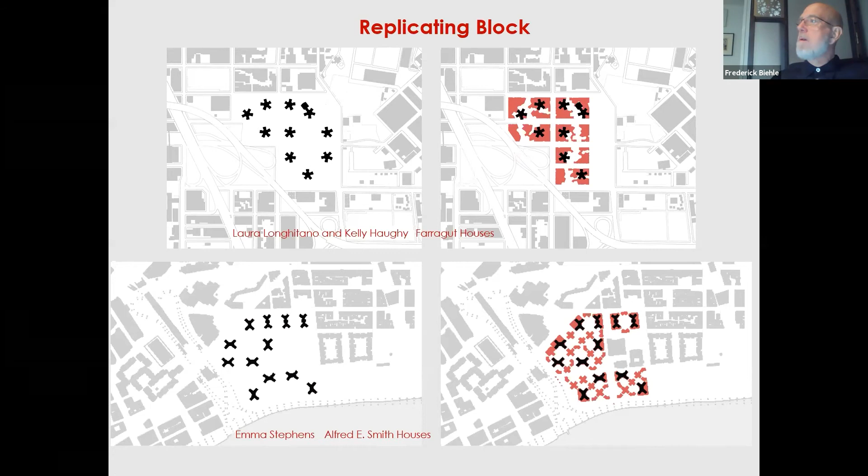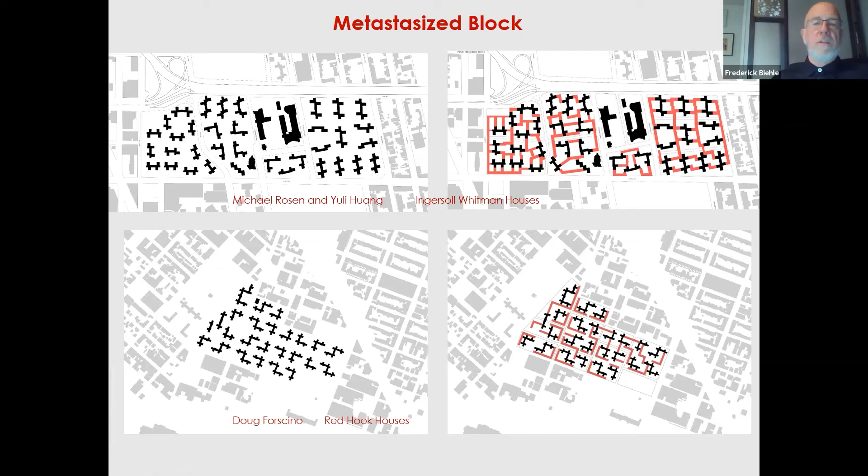The metastasized block is a fourth type, which tends toward greater spatial intensity because it links all the parts together. The result is something more labyrinthine. And then lastly, is just called the freestyle block because it's sort of non-categorizable.

But the other thing that comes out of this is the realization that this is such an incredible opportunity right now that this very real NYCHA crisis presents, and it really shouldn't be underestimated, because we really have a chance to infill the tabula rasa of open space cleared by perhaps the greatest public works project in history. This is an opportunity for our century, an opportunity not just to fix the mistakes, but to redefine the future city. And as I think all of these schemes communicate, the possibility of generating new urban identities while simultaneously making our cities whole again is certainly within our grasp.

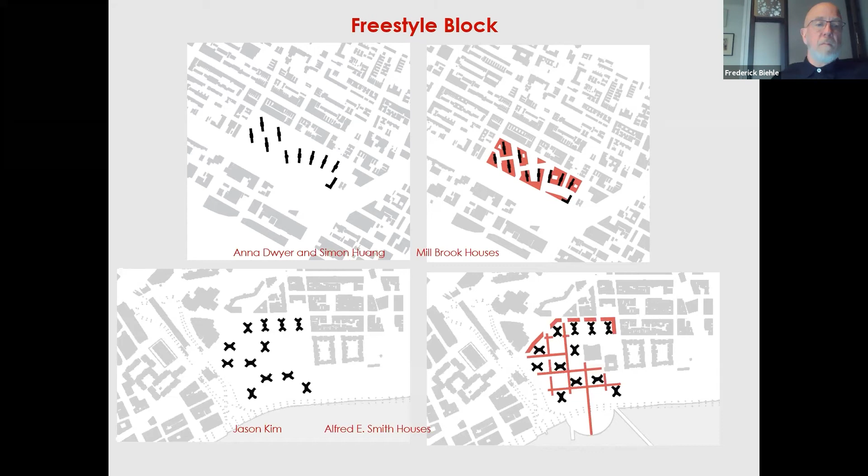So that's what I have for you this evening, which is a backstory that led to a speculation on what might have been a more ethical and less polarized city, and then what I hope are two provocations that suggest it is something that might still be achieved. So thanks for having me.

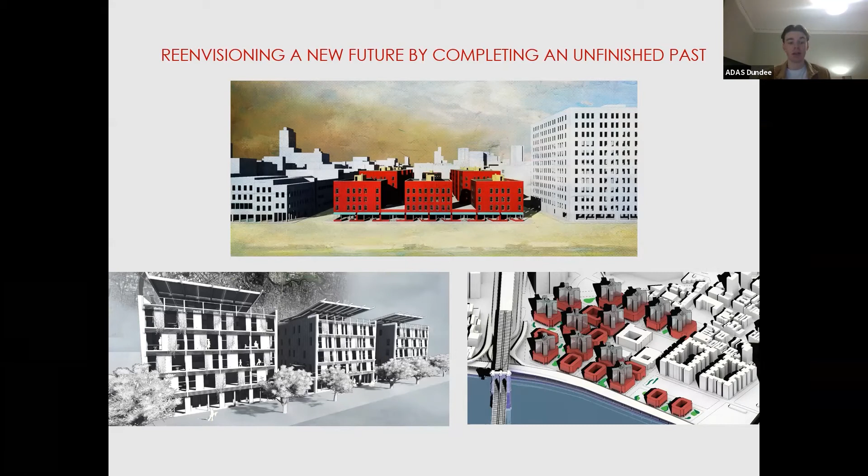But I'd like to ask personally, so you mentioned the use of mass timber within your studio groups. How widely is mass timber used within New York, and how is it accepted?

Well, it hasn't been accepted for New York City as of yet. There's an anticipation within the next few years that it will begin to be integrated. There are certain cities in the Western United States that have jumped ahead and opened up development of mass timber—the Northwest, Portland and Seattle, of course. New York City is a bit resistant. It has a sort of heavy concrete interest. There's a number of different obstacles to get it opened up.

But with a colleague at Pratt, we were involved in a studio two summers ago that interestingly selected a series of seminal early modern housing projects, all of which, of course, were concrete, and did a study to see how well mass timber might integrate or be used in lieu of that. And it turns out that because housing was really built around a kind of interior dimension of about 12 feet as a typical room dimension, mass timber, which also has that same limitation in terms of its spanning, works pretty perfectly, actually.